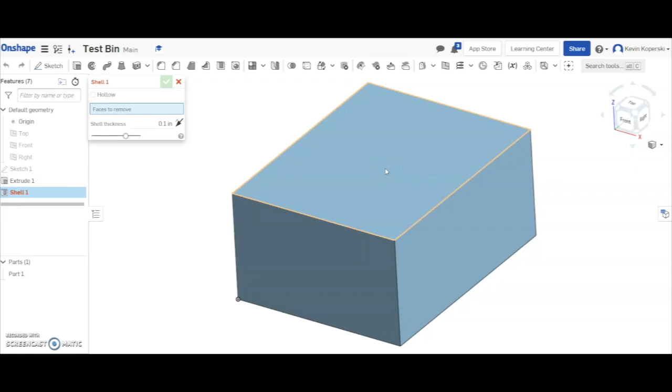So I'm going to select shell, and it says faces to remove, and that's just highlighting the face that you want. So I could make it on the front if I wanted to hold papers or objects or post-its going this way. But I'm going to do it on the top just because I think it's a little bit easier to visualize what I'm going to try to make here. So I'm just going to make like a bin, a normal size bin. And as soon as I click that face, you'll notice that the whole thing just kind of cuts out.

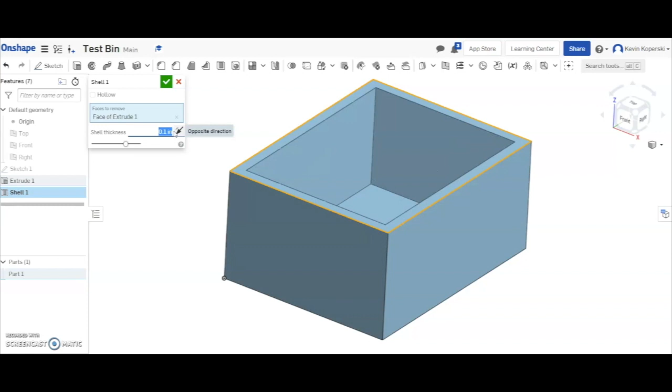And if you look at the shell thickness, this 0.1 inches is how thick it is from edge to edge. Right? And I can change that size, and I can make it relatively small. If I hit enter, you notice how small it gets. And obviously I can change it and make that bigger to suit however you want your item to look. So for the purposes of this, I think I'm going to leave it at 0.1. I'm going to hit enter.

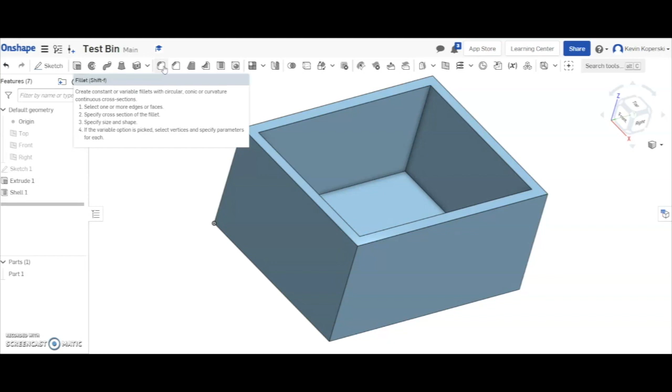And the other thing I want to show you guys, and we've used this tool before, is the fillet tool. And the fillet tool is going to help us round our edges. And the reason we're doing this is because if you're actually going to make a desk organizer, they typically don't have straight edges and corners. It's not aesthetically pleasing. When you move the bins around or you're trying to hold the bins, that's perceived as kind of rough or harsh. So we kind of want to smooth our corners and make it a little bit more user-friendly, if you will.

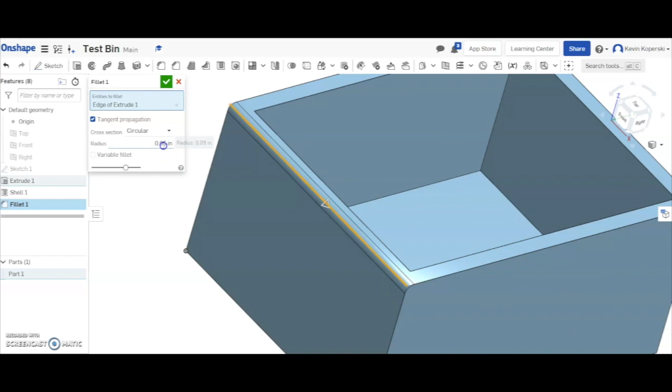So I'm going to click on fillet, and because I know I made this piece 0.1, I definitely want to make my fillet smaller than that. So I'm going to actually make my radius 0.05, and when I click on the edge, it kind of gives me a preview of what the thing is going to look like. And because I'm going to end up doing both sides now that I'm looking at this, I'm actually going to make it a little bit smaller. I'm going to go half this size, so 0.025.

And great. And all I'm going to do is select every edge going around the outside of the box, even the bottom. I don't have to do the bottom. I'm choosing to. You can do whatever you want with your box. And I am even going to do the inside edges here as well.

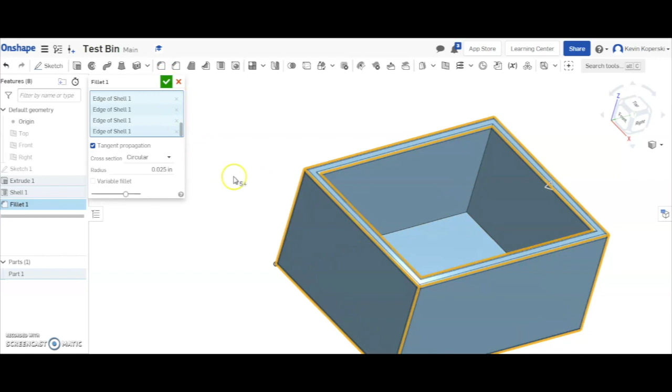And you can even do the bottoms. You can make the whole thing filleted if you would like. And I'm going to click OK. And you notice it kind of gives it a rounded effect. Again, it's a little bit more aesthetically pleasing. It's a little less rough.

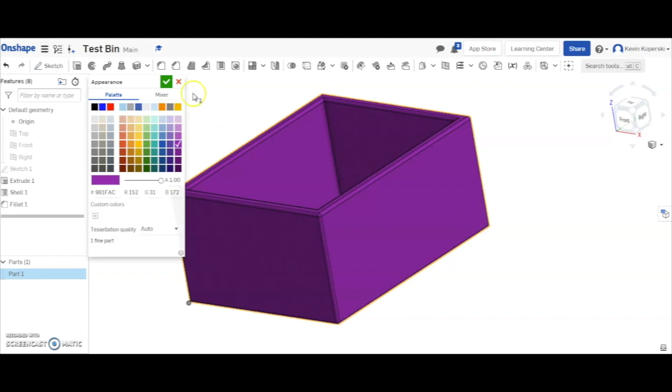And just like last time, I'm going to right click and I can edit the appearance. And I can change this to whatever color I would like, whatever's going to go with your theme. Most things are black. I might not make this black. Maybe I'll make it purple. It's kind of a cool purple. And you can see that it would suffice as my bin. And you can use this in a lot of different ways.

The other thing I want to show you and talk a little bit about is the base. So once you guys make all of your bins, remember each bin or part of your organizer, they don't all have to be bins. They might be something different. So keep that in mind as well. But for the base, they all have to fit on the base or connect to the base somehow.

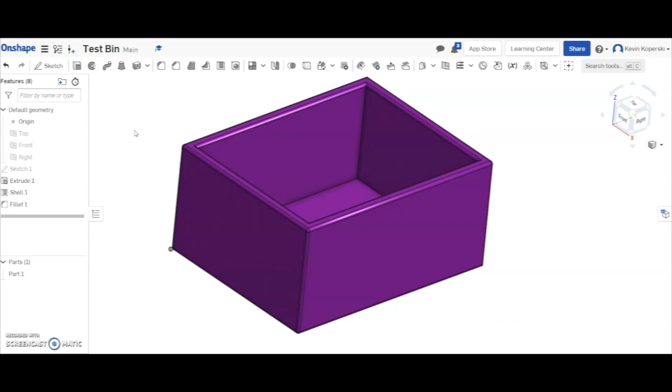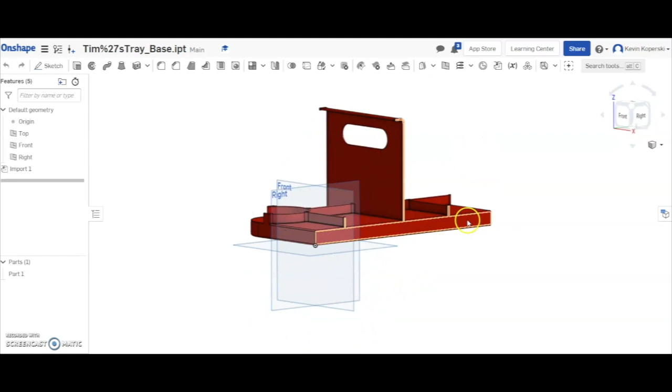So I'm going to show you guys more of the assembly part next week, but since I already have the parts drawn up, let me show you what my base is going to end up looking like. And I'll kind of give you the preview for what this is going to end up being. So this is my base, and remember we talked about it having a 3/4 inch thickness at the bottom, so that's this piece down here.

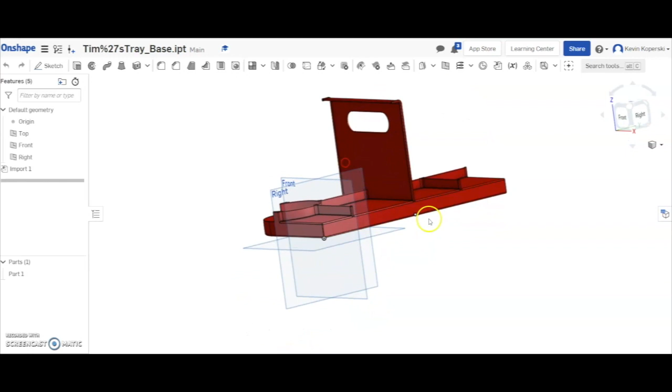But you can see I've drawn sections where each bin is going to go. This is a circular bin, and I even curved my corners here. It gives it kind of an aesthetic look, makes it kind of cool. And because I had done this for a previous assignment for another class at one point, I had made mine a handle so it was actually carryable.

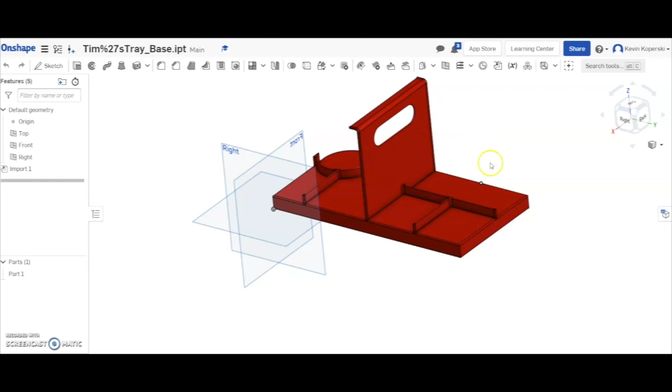So for those of you guys that are moving from place to place or workstation to workstation in your house, you might want to think about this as well. So this is a handle to carry everything, but everything else would rest on this section. So the one thing you want to make sure of going forward with this is that all my bins are going to fit into these sections.

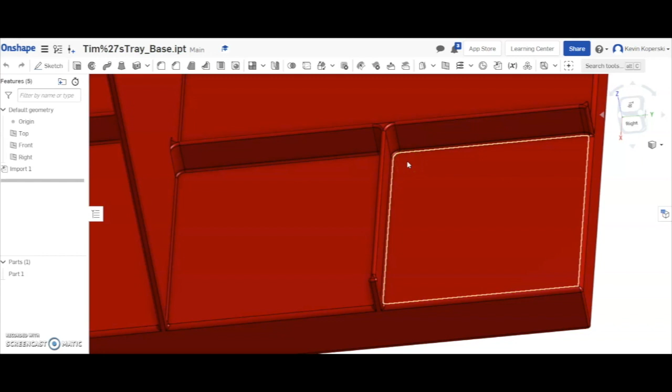It also would be a good idea if you have some kind of raised marker or corner edge, something that the part can actually fit into. So if you notice here, I have the little edges that will help bump it and keep that bin in there. That way when I go to do the assembly, I have a place to lock it in. But that's really it for this week. I'm keeping it relatively short.

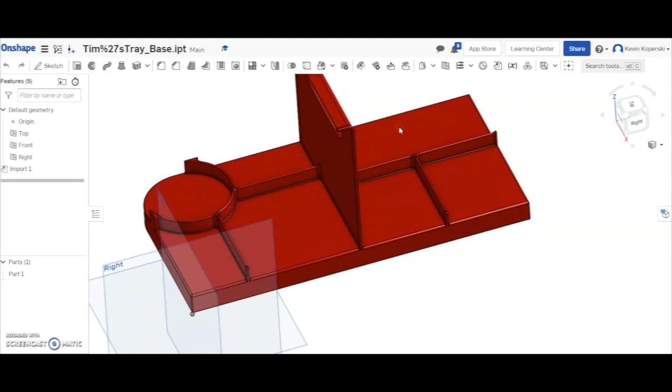So again, for this week, you guys are creating 5 parts, 5 bins of various sizes and shapes, depending on your drawings. And your 6th part is going to be the base, which can look something like this, where you have a handle on it. Maybe it has wheels, or it has a tray component or a lock component. I don't know, whatever you guys are doing. Maybe it clips to your desk in some capacity. But whatever that base is going to look like, that's what we're going to go with.

And then next week, I'm going to show you guys how to put everything together.